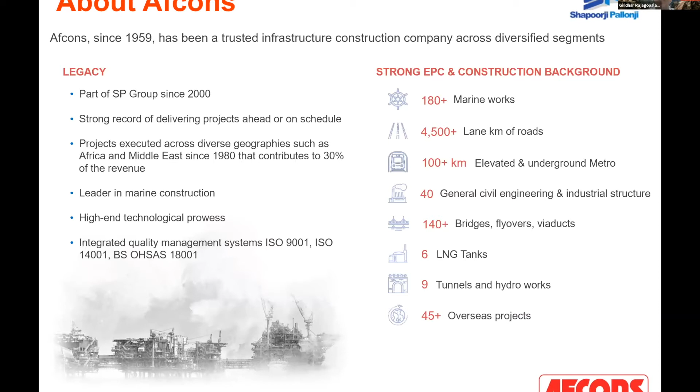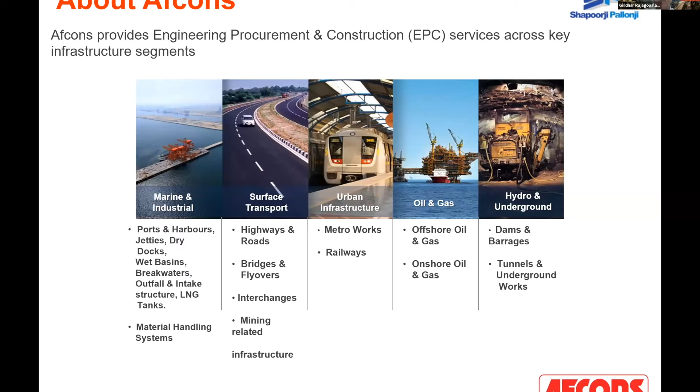Before I start, I would like to share some insights about the group to which Afcons belongs. Afcons is a part of the Shapoorji Pallonji group. It's been a part of this group from 2000. Afcons itself was born in 1959. We are about 62 years young, and we have a very strong EPC and construction background. We work in 5 verticals: marine and industrial, surface transport, urban infrastructure, oil and gas, hydro and underground, carrying out a gamut of engineering projects which are not only challenging, but in some cases extreme. That's a small nutshell about Afcons. Without wasting too much time, let me dive straight into the project. Let's look at Chenab Bridge.

Once completed, it would be the world's highest railway bridge. It's being built to link Udhampur, Srinagar, Baramulla as a rail link project. It is situated in the Himalayas, which is called a very active and young mountain. It has sub-zero temperatures, a very difficult accessibility to the location, a sensitive border area.

These particular things made us look at ways and means to carry out that project, and there was a great need to look at newer technologies and innovations in order to execute this project. Incidentally, this project is at an altitude of 840 meters.

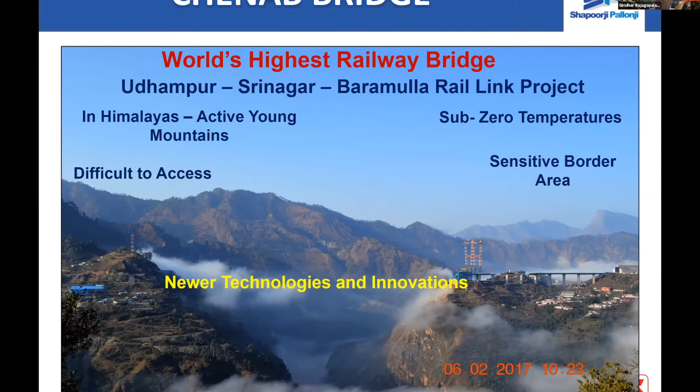What I would take you today through is a brief introduction to the Chenab Bridge, the details of the arch, the planning of the different elements, including the cable crane, trial assembly, lifting of the different members, transportation and erection of the wind bracings, global and local erection cycles, stressing of the stay cables, geometry control, arch closure, and then the safety challenges that we faced, the other challenges we faced, and what we have now foreseen as the factors that led to the successful closure of the arch.

So let me start by introducing the Chenab Bridge. Before I start the Chenab Bridge, let me introduce the key stakeholders. Clients are Northern Railway and Konkan Railway Corporation Limited. Contractor is Chenab Bridge Project Undertaking, which is an undertaking of Afcons Infrastructure Limited. Design consultants are WSP Finland and Leonhardt, Andrä and Partners Germany.

Proof consultants comprise Scott Wilson Kirkpatrick and Company England, Scott Wilson Kirkpatrick India, Flint and Neill London. They are now called AECOM and COWI since they were taken over. The slope stabilization part of this project was handled by IISc Bangalore, IIT Delhi, and Itasca USA. Last but not the least was the enabling work design, which to a large extent was done in-house by Afcons Infrastructure Limited.

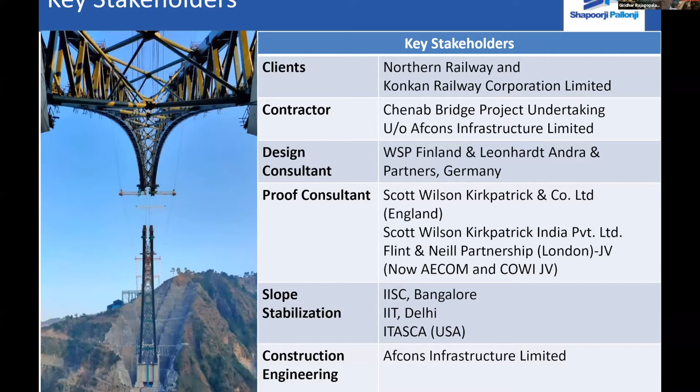The key to this project was the planning, which we will discuss in greater detail as we go more into the project. To give you a snapshot of this project, you can see the link between Udhampur to Baramulla. The blue portions of the project are the portions which are already completed, whereas the red portion, which is in the difficult part of the hills, is under construction.

Chenab Bridge is at about 125 kilometers from Jammu, and one of the most important challenges was the accessibility to the project. The nearest location, which is Reasi, up to which 40-foot trailers could go, had to be made as a transshipment point for all our materials, including our equipment. Our equipment had to be then transported from Reasi to the project site in knockdown condition, reassembled and commissioned.

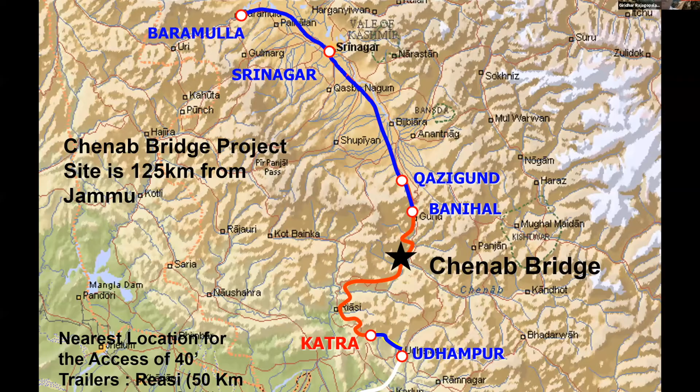I will show you the general arrangement. The key features are the total length is about 1,315 meters. It's about 359 meters above the high flood level. The arch span is about 467 meters, and the viaduct had both a transition and a circular curve, which was in itself a unique challenge. It was about 35 meters taller than the Eiffel Tower, if we want to compare it with the Eiffel Tower.

This is another view of the arch of the bridge elevation. The arch portion with the arch of 467 meters had a superstructure of 785 meters and a viaduct of 530 meters. Very important to note that the expansion joints that are likely to be provided in this project have movements of plus minus 800 millimeters, probably quite large in the context of Indian bridges.

There is something which I have now put on the slide, which is circled. These are the locations of the pylons which supported the cable crane, and the location of these was one of the keys in making the arch erection a very great success. Later, when I take you through the erection, you will understand the importance of these locations.

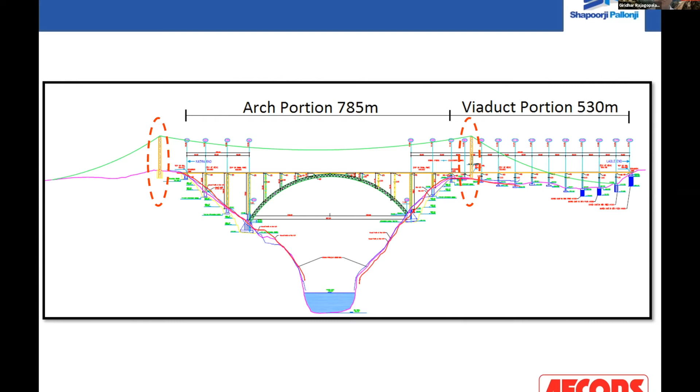Some of the main highlights of the Chenab Bridge in a nutshell are: it's the world's highest railway bridge once completed. It has a design life of 120 years. We have done an incremental launching of the deck superstructure on the viaduct, which had a combined circular and transition curve, the first time in the world. World's largest capacity crossbar cable crane has been used for erection. Extensive wind tunnel testing was carried out, first time in India for this project.

Fatigue designing and detailing of the bridge was again carried out for the first time in India. Installation of double corrosion protected bars and cable anchors also done for the first time in India. And we have used 10.9 grade, one of the largest diameters available in this grade, M36, with a Geomet coating to ensure durability of the bolts. The design was blast resistant. Some of the key other considerations were the geographical location of the project.

It's in the snow-clad Himalaya mountains, sub-zero temperature, so we needed to adopt very special structural steel. Highly active seismic zone, so hence a site-specific response spectrum had to be deployed. Dynamic analysis of the structure and ductile detailing was also the need of the hour.

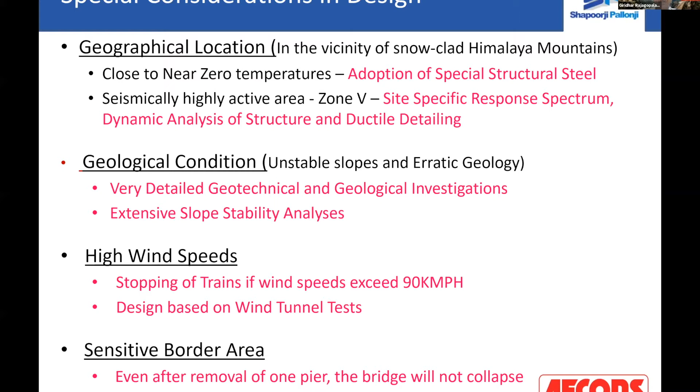Further, this being in a very sensitive border area, the bridge was designed with some redundancy. Even if one pier of the bridge is collapsed, the bridge would still stand under its self-weight. Further, when it came to the arch, we could actually remove one of the chord members, but still the bridge would be stable and it could still continue to carry traffic at a restricted speed. No doubt, the speed restrictions would continue till this damaged chord is reassembled.

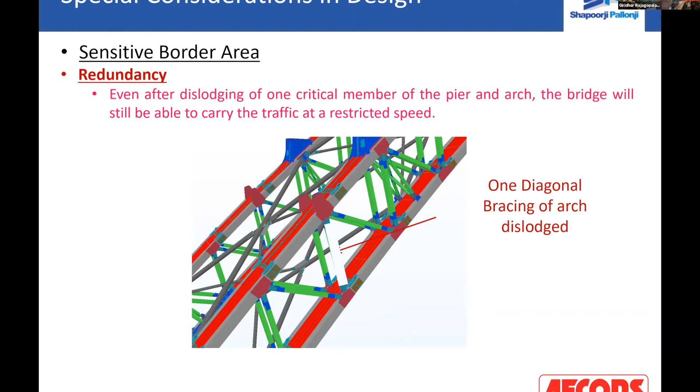Similarly, one of the vertical diagonal members could get dislodged, but still the same parameter of the bridge being stable and still being able to carry traffic at a restricted speed would be possible. So these are the special considerations under which this bridge has been designed.

What is not shown on this slide is the consolidation grouting that needed to be done on both the banks, which in itself could be a paper for presentation. This area has highly fissured rock, and hence it needed about 23,400 metric tons of cement to be used to grout it. Highly fissured rock, the need of the hour was to come to a fine point of ascertaining the pressure at which it has to be grouted. This in itself was a technical challenge. A lot of trials were carried out to ascertain the right pressure for grouting.

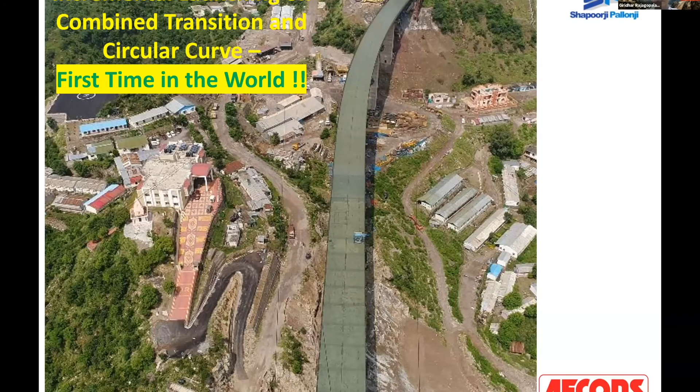When we go to the viaduct, this was the viaduct which we did on a combined transition and circular curve. First time in the world. This in itself was a great challenge. But what was very satisfying for us at the end of it was that we started the transition and the circular curve launching from P180, which you can see on the far right of the slide. And we went pushing this up to somewhere in between P120 and 130. Then we did the straight launching from P80 towards P120.

But what was most important was that when both these met with each other, the lateral adjustment that needed to be done was only 3 millimeter. I repeat, 3 millimeter, which was the accuracy that we were able to achieve by proper guidance mechanism.

Next, I will take you through some of the slope stabilization photographs. On the left, you are now seeing the slope of one of these sites, which is the left bank. Excavation was to the tune of about 6.3 lakh cubic meters. Rock bolting was around 33,000 running meters. Shotcreting was 55,000 square meters. And Dywidag bars were about 4,000 running meters. This was before excavation. So when we really looked at it and we went there the first time, there was a lot of wonder in us whether we could carve out this hill and create the foundations.

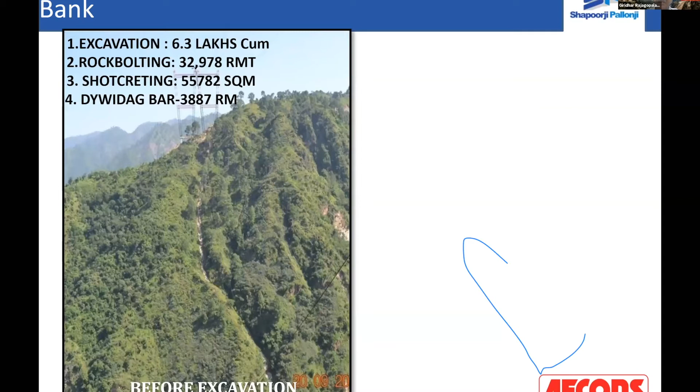I'll now take you through the right photograph. This is how it looked after we carved out the hill, carried out the slope stabilization, and located the foundations, starting with S10 abutment, S20, S30, and S40, which in itself is a gigantic structure supporting the base of the arch. The total vertical excavation was 215 meters with slope angles of nearly 70 degrees between the berms. And this was a very, very crucial element to ensure the start of the arch erection.

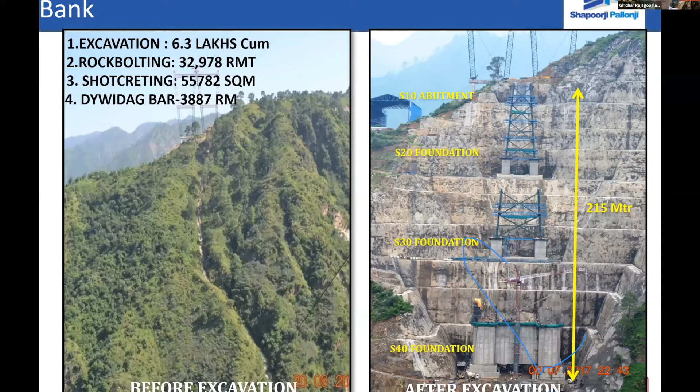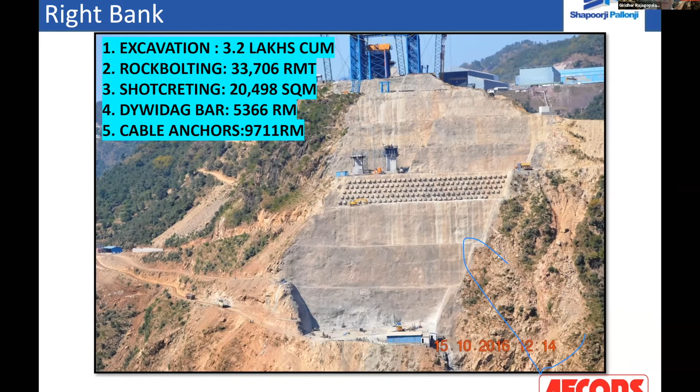What I would like to share here is that after the arch foundation was constructed, there was a pier that was erected on this arch foundation. This structural steel pier was 145 meters from the ground level. And what we could achieve was a great tolerance when it was finally erected.

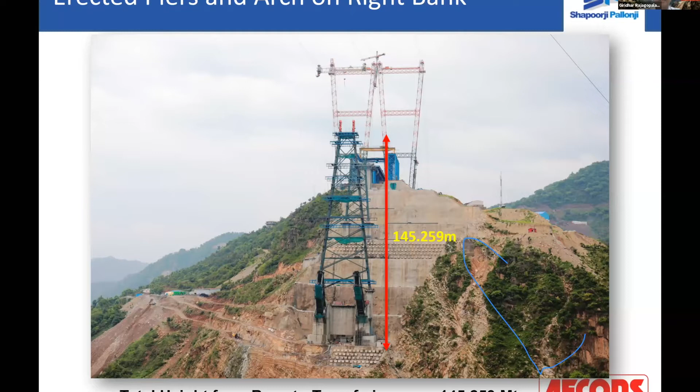This slide shows you that the designers had permitted a tolerance of 100 mm in any direction. This complete pier had HSFG bolts of 10,512 numbers. Bolt hole clearance was 2 mm. What I mean by bolt hole clearance of 2 mm is, if there was a 32 mm dia bolt, the hole that was drilled was only 34 mm. With this sort of tight tolerances, we were finally able to erect.

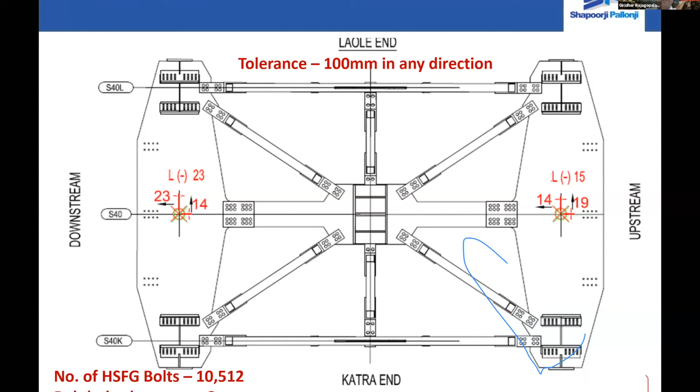I will now take you through the details of the arch, which is the topic for the day. The arch span is 467 meters. Height above the springing level is about 136 meters. The arch had a horizontal alignment which was straight, a vertical alignment which was level. The arch shape was parabolic. The taper of the arch in the vertical plane was 4.23 degrees. The arch had fixed support conditions.

The arch section had prefabricated boxes which were to be later filled with concrete after the arch is closed. Different grades of steel starting from E410C to E410 plus Z35 were used on this project. I would like to highlight here one thing. While all these materials are theoretically available in India, they are very rarely manufactured by the Indian steel parties. So a lot of input, proactive collaboration with the steel manufacturers had to happen right at the beginning to produce this steel of a right quality and grade.

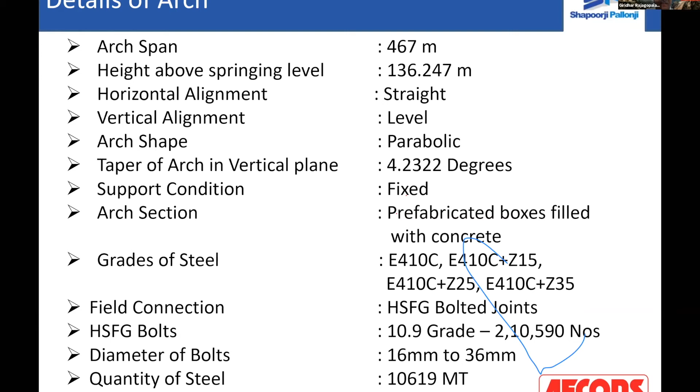Let me now take you through the planning for the design and erection of arch, the first part, which is the cable crane and sizing of the members. We have deployed the world's largest crossbar cable crane with a payload capacity when it works in tandem of 34 metric ton. On the right, you can see the image of the cable cranes working in tandem with a tandem bar. The weight of this tandem crossbar itself was 6 metric ton.

And the beauty of this cable crane is that it can be worked also individually with a capacity of 20 metric ton. So there were times where the left side cable crane was being used separately, sometimes the right side cable crane separately, and when the need arose, in tandem.

The maximum weight of the arch component hence was driven by the capacity of the cable crane, which was 34 ton. When the designers and Afcons sat together, a lot of brainstorming was done, and that is why the arch was split up into 1,375 components, which could each be handled. No doubt, while they had 1,375 components, the total number of lifts were reduced by other means, which I will explain a little later.

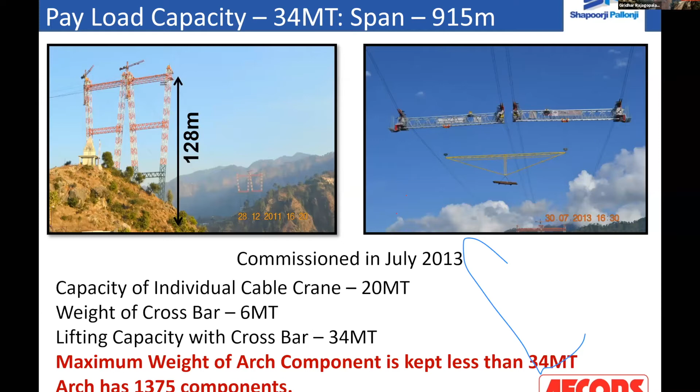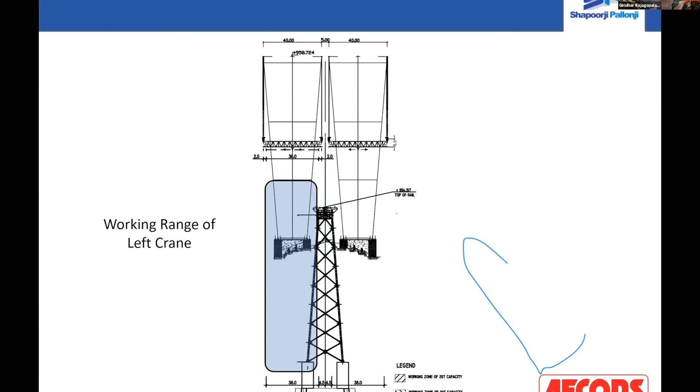When we look at the important thing which I explained a little before, you can see that the left cable crane had a working range, the right cable crane had a working range, and there was an area in between which could not be accessed by the cable crane. So to access those areas or greater weights, there was a need to combine the cable crane and use the crossbar, thereby not only covering the total width, but also having overlap to help us handle the project easily.

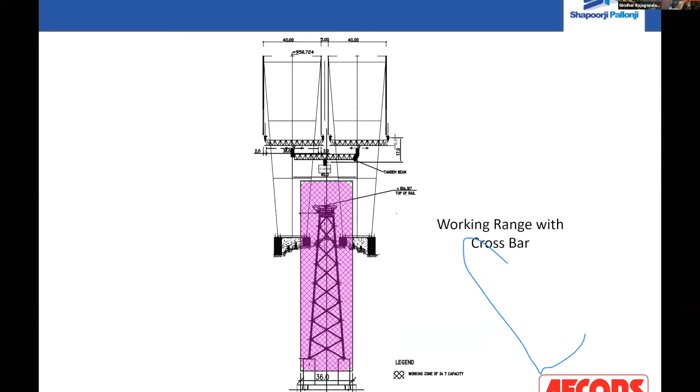We will now look at one of the important components, that is the trial assembly, which we did. There was a lot of debate within our teams, along with our designers and our project people, about whether at all we should carry out a trial assembly. And if at all we carry out a trial assembly of a structure which is 467 meters, where do we find the place in the mountainous terrain to do this erection?

A lot of brainstorming extending into late hours happened, and finally we came to a solution, which I will explain in the further slides. But first and foremost, we decided to do a mock-up of the arch in a scale of 1:10 to understand what sort of tools and tackles and enabling works we will need to incorporate in the process, so that it will be very easy for us to erect the arch segment, bolt it, and also maintain its geometry. With this sort of a study on a scale of 1:10, it gave us the confidence of building upon it on a larger scale.

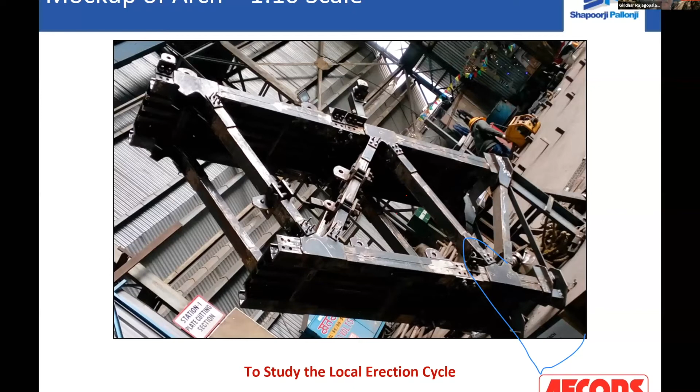This is one critical component of the arch erection methodology. The second part was that we looked at trial assembly in a laid down condition. I will explain what the laid down condition means in the next slide. It was also done so as to accommodate two modules of wind bracing at a time. This was critical because the place available at the location was not adequate to completely erect even half the arch in its totality. But all these precautions and trial assemblies, which I will explain, actually led us to do finally what I would call a flawless erection of the arch, leading to its successful closure.

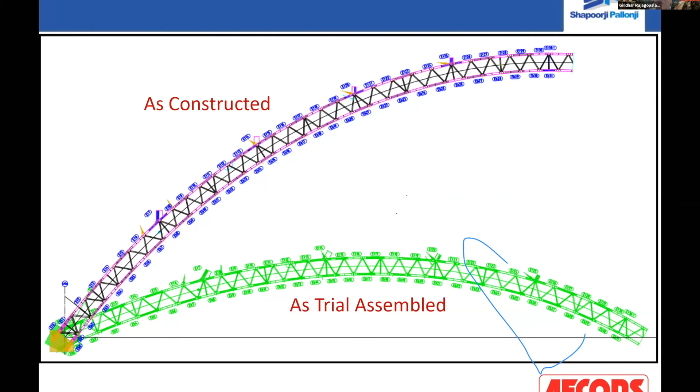So what I call a laid down assembly: the figure on the top shows the as-constructed location of the arch. But when the trial assembly was done, it was rotated so that the handling would become easier, and the trial assembly was carried out in a laid down condition. The trial assembly was also carried out for two modules. You can see module 1, which is approximately 40 meters. Module 2, again, approximately 40 plus meters. The joint between module 1 and module 2 is the place where the wind bracings are ending.

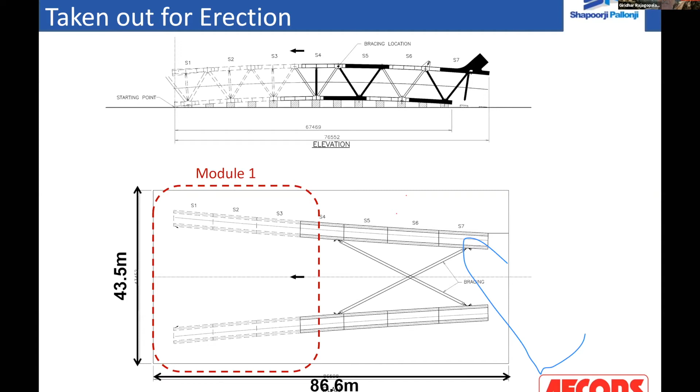We decided that the trial assembly will be carried out on a plan area of about 90 meters by 50 meters, which we developed near the top of the bridge at the right bank, and we used this space to do this trial assembly. Module 1 and module 2 were first erected. Subsequently, module 1 was dismantled and moved out and sent for sandblasting, grit blasting and painting. Module 1 was then moved back, and then module 3 was erected, and we continued to erect till we reached the crown of the arch. This we did both for right bank and left bank next to each other, and hence this complete trial assembly gave us a level of confidence that we would definitely be able to erect the arch in its final form. This was the second key parameter, I would say, to achieving a flawless execution.

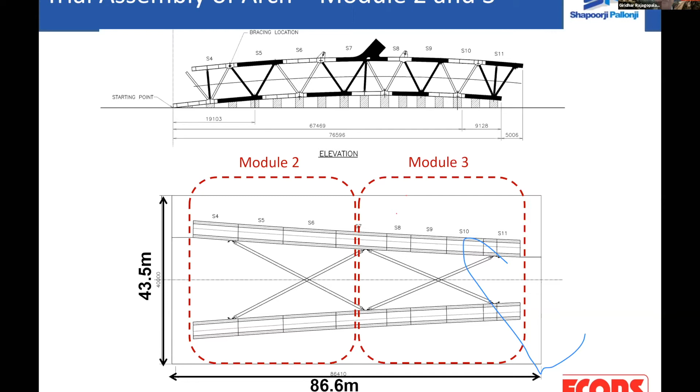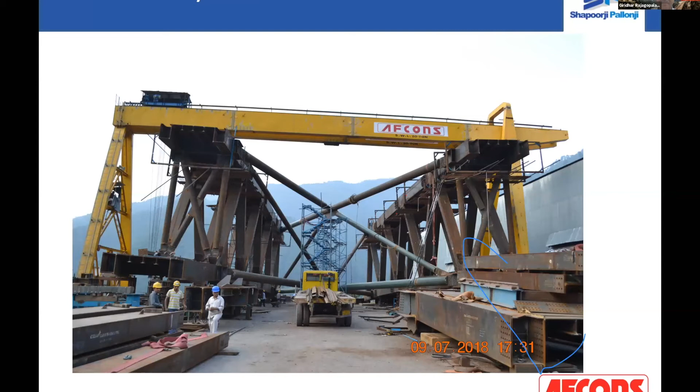Now we'll go into the next part of the criticality of an arch, which is the lifting of the individual arch segments. It is not out of place to mention here that the arch segments are inclined inwards with an angle of about 4.2322 degrees. In the vertical plane, the arch segments vary from an angle of nearly 52 degrees to near horizontal in the center. The segments also needed to be lifted by the cable crane as nearly as possible to the design inclinations, so that with minimal effort, the erection of the segment can be completed.

As I explained previously, we had 1,375 components, but by pre-assembling some of the components based on the weight and the capacity of the cable crane, the total number of lifts was reduced to 944. The reason being, as we dived deep into the project, we came to the conclusion that in order to do a safe erection of the arch, there is a great amount of enabling works and platforms which will give access safely, and that itself was amounting to 378 lifts. So in order to reduce the load on the cable crane, we combined some of the arch components to 944 lifts, so that the total lifts would still be around 1,300.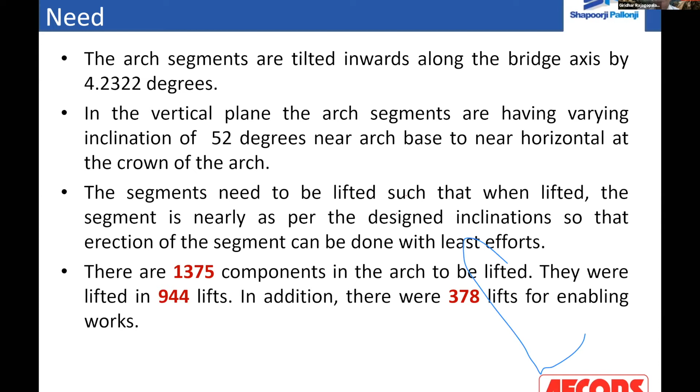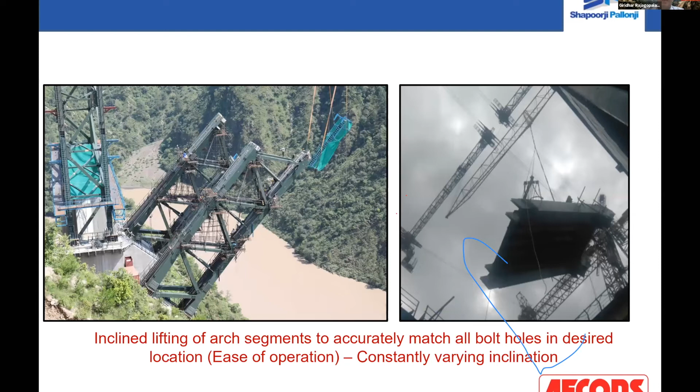These are some of the photographs of the segments of the arch being lifted. You can see that at the beginning, it is at 52 degrees. And as we go towards the center, it was nearly horizontal. This was the methodology used.

Here, I would also like to say that thanks to our consultants, right from day one, they started working on a 3D model using Tekla. We were also asked to get ourselves fully trained and equipped by using Tekla models. So we had a good team within the project team who were competent to handle the Tekla model. And using the Tekla model, we were able to determine very accurately the CGs of each of the segments that we were planning to lift, and were able to derive the different lengths that we needed to use with adjustments for the different slings that were used.

This was, I would say, the third critical event, the planning of the segment lifting and the detailing and the lifting for each and every element of those 944 lifts.

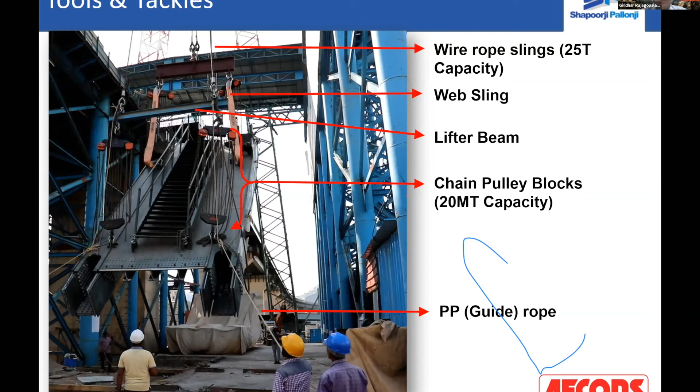Here you can see some photographs where you can see the wire rope slings, the web slings, some lifter beams to assist in the lifting, chain pulley blocks to adjust the micro-millimeter changes that we needed to do, and the polypropylene guide rope, which forms one of the keys in ensuring that the material doesn't sway as it moves to the location with the cable crane. Another view of the lifting arrangements, two different types of lifting arrangements that we used with the cable crane.

Now I will come to one of the most important components of this erection, which was the wind bracing. In the trial assembly, I had shown you that the wind bracings were erected, and the length of this wind bracing was approximately 40 meters. But to carry it, you can see, from the location to the place where it can be fed into the cable crane was itself a challenge.

Second, the arch at the beginning had a width of 35 meters, and at the crown it almost reduces to 9.5 meters. The wind bracing had gussets in 3 directions. So geometry was a big challenge for us in this.

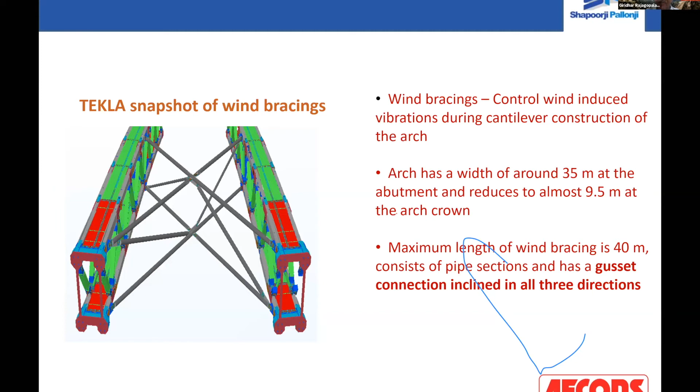So once the trial assembly was perfectly achieved, the pipes were all dismantled. They were made individual. And then, just to show you the complicated photograph of the location at which these gussets are coming, if you see on a typical central joint, there are 116 HSFG bolts, again with that same 2 mm clearance, and we were able to achieve it with no imperfection. And you can see how snugly it has fitted into this system. This also was because of the trial assembly and getting it all resolved before it actually went to the site.

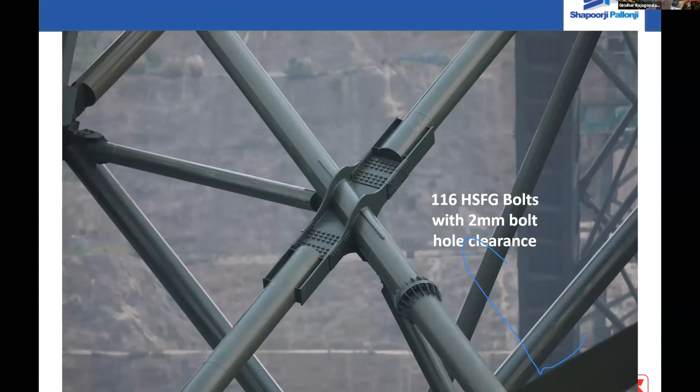Also, transporting these pipes after they have been trial assembled, grit blasted and painted was a challenge. The road from the place where it was trial erected to the location where it can feed the cable crane was a very, very steep incline. This road not only carried this pipe, which was a far lesser weight, but at one stage also needed to carry the superstructure that was erected from P80 towards 120, which was weighing nearly about 140 tons.

So a lot of thought process and decision on getting the gradient of the road right, the material to be used on the road to get the right traction for our prime mover to be able to pull that 140 tons on an SPMT to the location was actually done on paper first as an enabling work, executed at site, so that the operation became very smooth. This is a photograph of one of the pipes being moved to the location with the help of 2 cranes.

Most importantly, in the third or fourth slide, I had shown you the location of the pylons of the cable crane. This is a berm which is at one of the foundations at the top. And berms were used very innovatively to stack these materials. No doubt, the excess load on the berms was checked from a load point of view so that we don't have a problem on any of the berms, in discussions with our consultants, IISc Bangalore. So adequate precautions were taken.

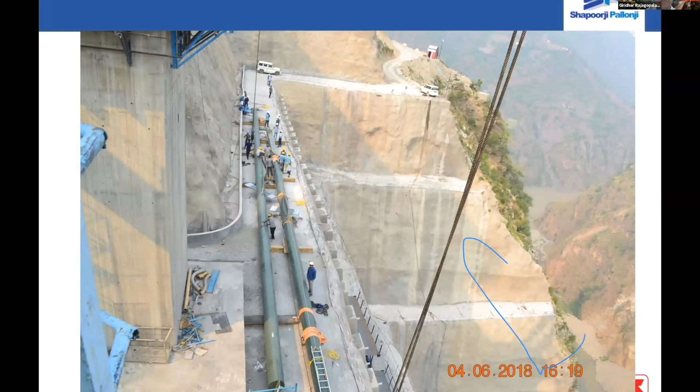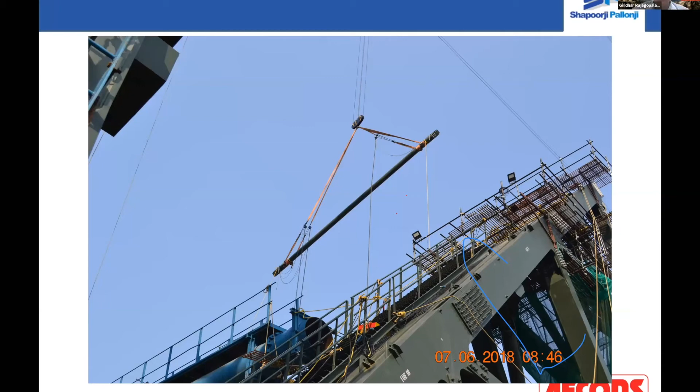This is another view of the cable crane actually lifting it and taking it to location. And most importantly, what this photograph shows you is the safety features that we incorporated in the enabling works. The blue parts of this photograph clearly distinguish the enabling work from the permanent work.

You can see that the worker is having a safe access to each and every point where he needs to work. You can also notice that on the already erected arch, there is a ladder with a handrail that is provided, which is a permanent feature of this arch, which was constructed along with the segment itself, so that it gives access to our workers to reach each and every point.

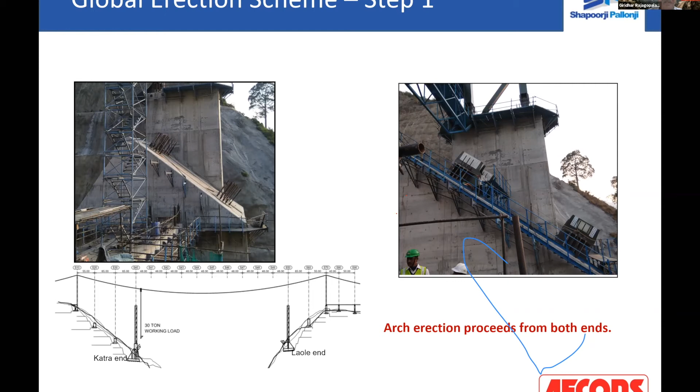So we started with 30-ton working loads from the cable crane. The cable crane was used to start erecting the arch segments. After a certain element of the arch was cantilevering, which was about 70 meters, the first of the forestay cable and the backstay cable were put in place, and they were stretched appropriately as per design requirements.

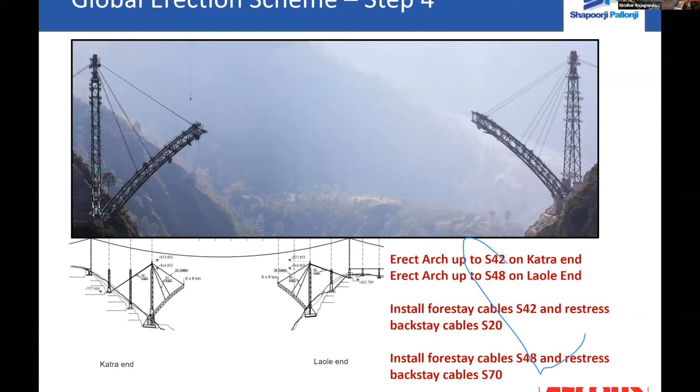Geometry control was ensured here, and later we moved to the next portion of the erection, installed the next set of stay cables, and in similar fashion we went ahead with erecting certain part of the arch, again putting cables and holding it back till we reached a level where we were close to closing, and that's where we stopped.

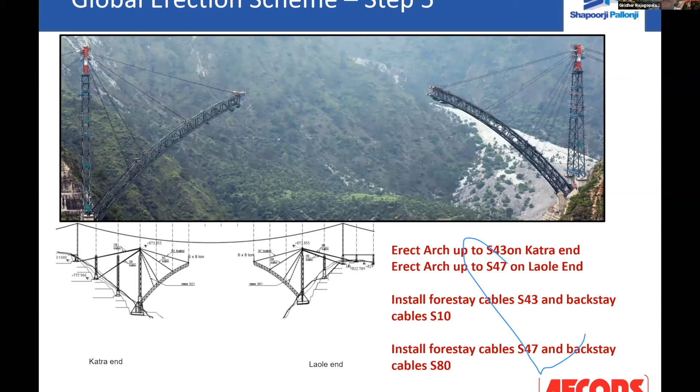This particular part, arch closure, I will explain separately. This is a photograph of the closed arch as it looks, but we will separately have a small detailing of how this arch was closed. This is global erection in its totality.

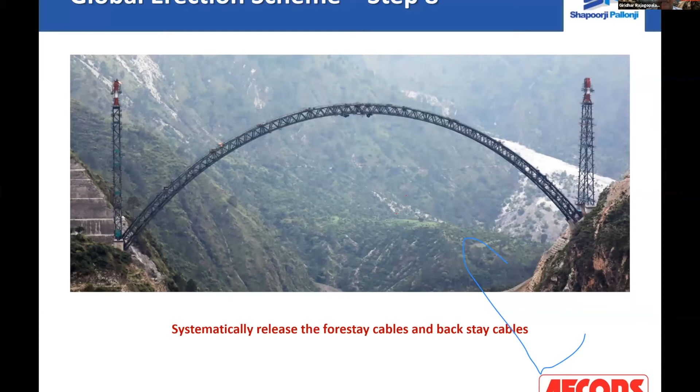So once the global erection is completed, that's not the end of the game. We needed to remove these temporary cables. So all the temporary cables were removed, which in itself was a project at that height and at that weight. And once they were removed, then we were able to go to the next process.

One point I would like to share here is the stressing of the temporary cables itself had a lot of sequencing to be developed. Here, I would not be hesitant to say that as these cables were being stressed, there was such a great and very, very helpful interaction with our client, with our consultants based out of Finland and Germany. They were available to us, I would say, nearly round the clock, helping us as we did the stressing and ensuring that we were able to get the perfect geometry as we move forward.

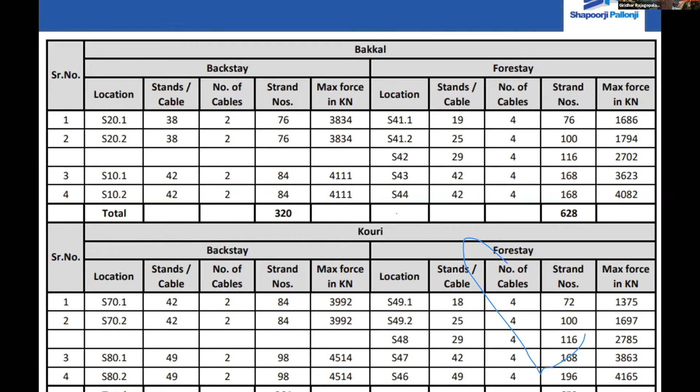Then we moved in to do 100% on the backstays, and then moved into the inner cables to do a 50%. So there was a constant movement of this stressing from inside and outside, but all the stressing was happening on the temporary pylon, both on the left and right. So the movement of these pre-stressing equipments was minimized so that there could be good saving in the time.

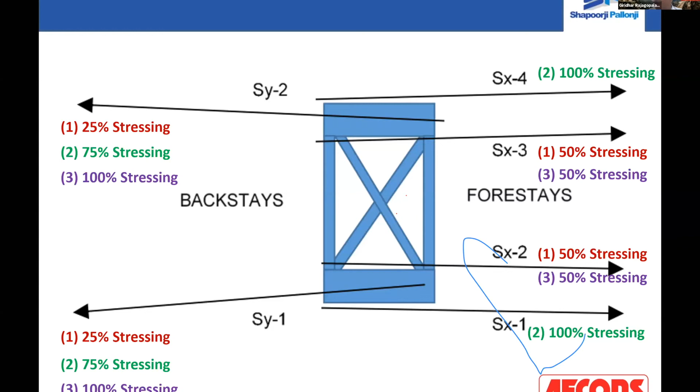Now we will come to the most important part of the project, which is the geometry control. And I would like to share with you the most important part was the springing point of the arch. That is the point from where the arch takes off from the concrete foundation. Huge amount of effort and concept and brainstorming was carried out to ensure that the base plate of the arch was embedded in the concrete foundation to a great level of accuracy.

No doubt, our past experiences of providing template and bolts for very heavy foundations like turbines did help us evaluate various methods. But the challenge here was that this complete template, if you see, was at an inclination. So we developed a template. This template had a lot of shear studs at the bottom. It also had bolts coming out through it.

And this full thing was embedded in the concrete with 6 geometry control points at the top and 6 geometry control points at the bottom. And we imposed on ourselves a tolerance of 5 mm, handling this weight of 10.8 and using a lot of time and precision to get this position. In one case, it took us nearly 2.5 days to fix this base plate.

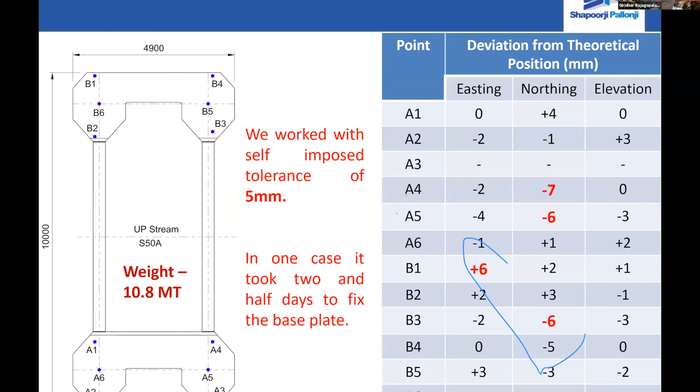So with this sort of a tight tolerance, we started erecting the base module. This is the base module that is being positioned. You can see the template at the bottom with a lot of rods sticking out. These base modules will get fitted into it. And subsequent to that, the gap between the base module and the template was grouted with a multi-metal compound, which can fill gaps up to 0.1 millimeter.

The intention being that the arch is a compression member, and it was a requirement that the arch be completely under compression and have full contact with the foundation. And so extra care and precaution in geometry, in fixing the base module and in ensuring 100% contact was ensured by these methods.

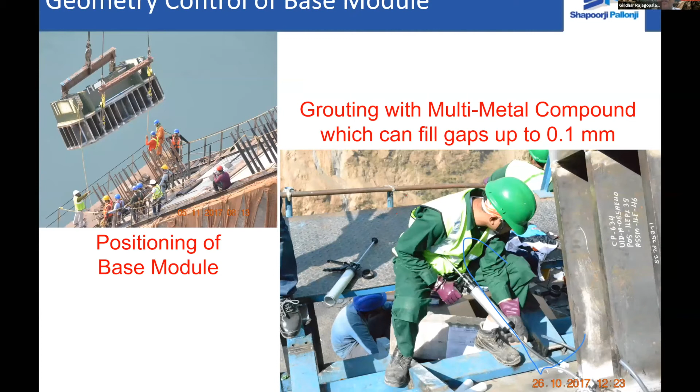This is another view of the erected base module, which you can see. You can see the safety access ladders that are provided all around, including the walkway. They are fully at an inclination.

And then there was further geometry control that was required to be carried out as we went subsequently with the arch erection. So some of the things that we did was that the designers, in discussions with us, we had 2 workshops in Stuttgart where we worked closely with them, and we came out with a set of geometry control points. And for each of these points, they had given us the theoretical coordinates at a baseline temperature of 20 degrees. Most importantly, and sometimes what is missed out and could lead to big issues, is the second bullet point here, that is the baseline construction loads.

In these workshops between the Afcons in-house enabling work team and the consultants, Leonhardt, Andrä and Partners and WSP Finland, each of these construction loads was positioned. These were detailed in the model by the consultants, and based on that, they gave us the theoretical coordinates, which were used by us when we started erection. So a lot of work went into developing the coordinates and the measurement of the coordinates.

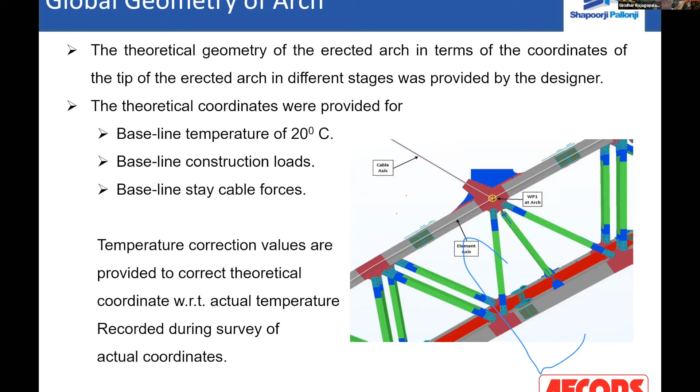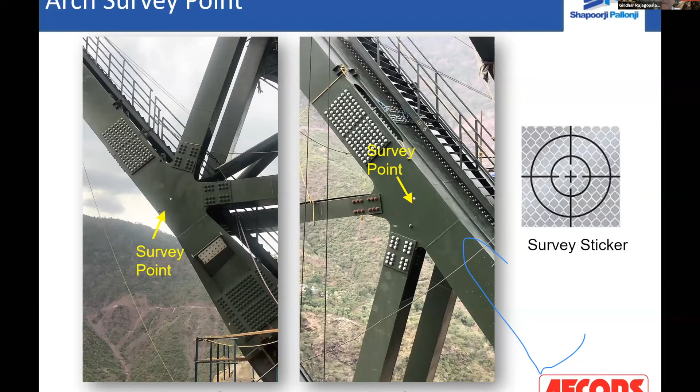You can see some of the survey points that were put. When it was close to the shore or to the bank, we used just a sticker, which was a luminescent sticker with a point. You can see on the right the survey sticker in the next slide. But as we moved further away, since the arch was going inside and the visibility was becoming a challenge, this point was pulled out by means of a vertical member sticking out with the sticker put on top. And the total survey was controlled by a total station.

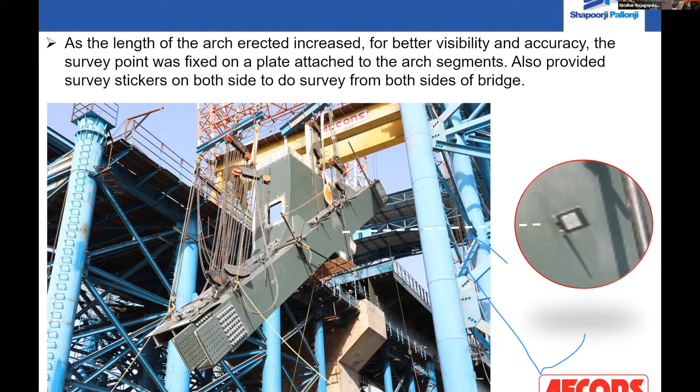2-3 fundamental things we ensured. We ensured that these points were the points that were on the drawing board, and hence we were measuring the coordinates of the same point which was given to us by the consultant. Second, and most importantly, all the survey work was done before 8 a.m. in the morning so that there is no temperature impact on the survey. And the temperature at the time of survey was also recorded so that we could cross-check it at any given time. Ultimately, these precautions and these workshops were very helpful because they ensured a flawless erection of the arch in its entirety.

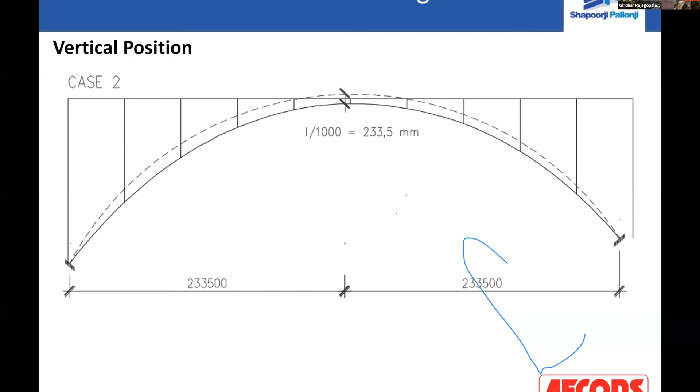Some of the tolerances that were provided by the consultant were in the vertical, horizontal, lateral. They had given us a constant of 233.5 mm. I will just take you through the next 2-3 slides quickly. Vertical position, below the theoretical, above the theoretical, horizontal position as can be seen from the drawing, and then the lateral position on the plan view.

So all the locations they had given us a 233.5 mm, but with the tight geometry control that we were able to achieve, and with the other things which I told you, the 4 important things like trial erection, like assembly before, all which we did, and the survey, the base module fixing in correct location. Ultimately, this was the formula on which they had given us the tolerances.

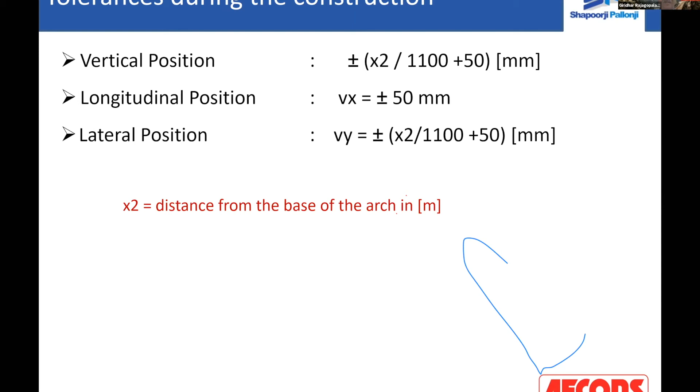What I would like to point out here is that the X2 is a very important phenomenon. As the length increases, the tolerances were being permitted to be increased, but our intent was never to go to the tolerances. So with this sort of a control, we achieved these tolerances at the end, just before closure of the arch. You can see the vertical tolerance provided was 100.4 mm.

The tolerances in the direction of the bridge was plus minus 50 mm. The tolerance in the lateral direction was plus minus 100 mm. But you can see that as per the figures that we have, we were well within these tolerances, which are actually listed by red arrows at the edges of the arch, which are standing freely erected.

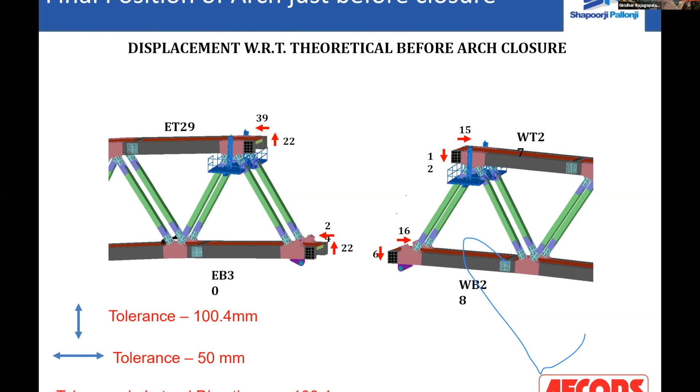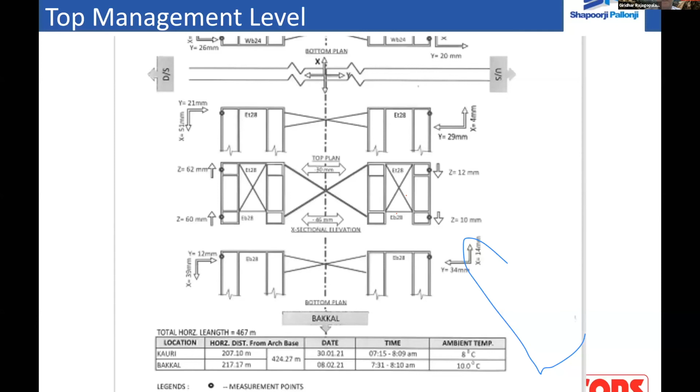I will go to the most significant part of the arch. We will look at arch closure. When we have actually erected the arch, it would not be out of place to mention here that the arch would be cantilevering nearly 230 meters from each side. So it would have its own dead weight deformations and deflections. Also, there would be a certain amount of lateral misalignment.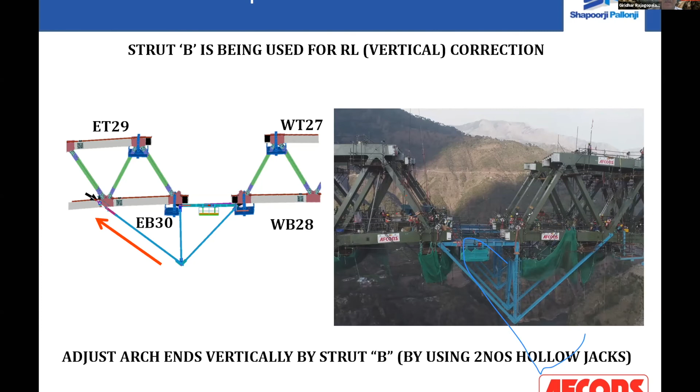A tripod was erected and a force was applied in the direction that is shown in the red arrow. This was a very small force, and this enabled us to do the fine-tuned adjustments of the bottom chord and get it into the correct geometry. Once this geometry was achieved, the prefabricated bottom member, with one of the splice plates on one side not being drilled, was brought to location.

It was lowered in location and the splice plates were rotated to take the markings of the holes already provided on the arch. It was rechecked for accuracy and it was found that it was within millimeters. So it was withdrawn, taken to the shore, the splice holes were drilled, brought back, and then it was subsequently lowered and installed. And this was the segment EB31.

So here, the only small thing I would like to note is that the splice is both on the left and the right. So the splice would have two pairs of holes on the right, two pairs of holes on the left. The left holes were pre-drilled; on the right holes, one side was pre-drilled, the other side was kept free for taking a proper measurement and ensuring that it got properly fitted. But even in this case, we were within the tolerance of 2 millimeter.

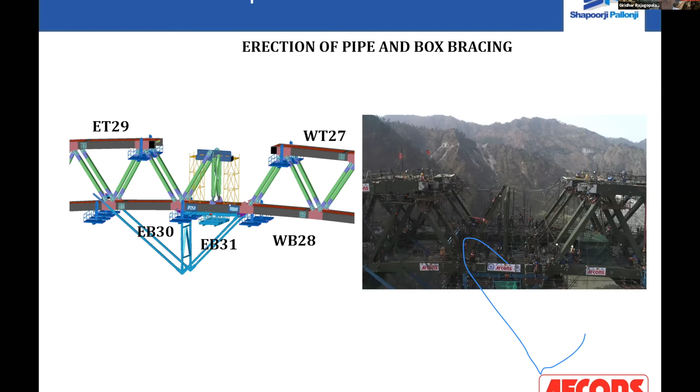So this closed the bottom chord, but that is still not the end of the story. After the bottom chord was closed, the vertical bracing and the diagonal bracings which were to support the crown element were fixed in place. Then the crown element, which is ET 30.1, was put in position. And once the crown element was installed, the element between ET 29 and ET 30.1 was fixed.

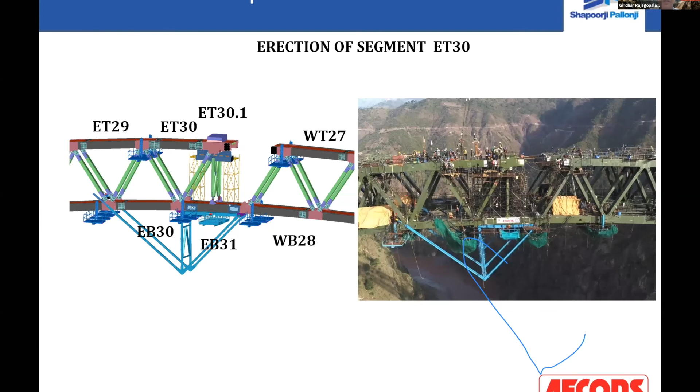After fixing this, again, there was a need to see that the top chord geometry is as per theoretical geometry. So none of these bracings were fully tightened. A Y yoke was installed, as is shown now in this photograph in blue color. And using this Y yoke, ET30 and WT27 were pushed against each other to again ensure that there is a small rise, and the gap as required from 5498 was made 5603, which was the theoretical requirement.

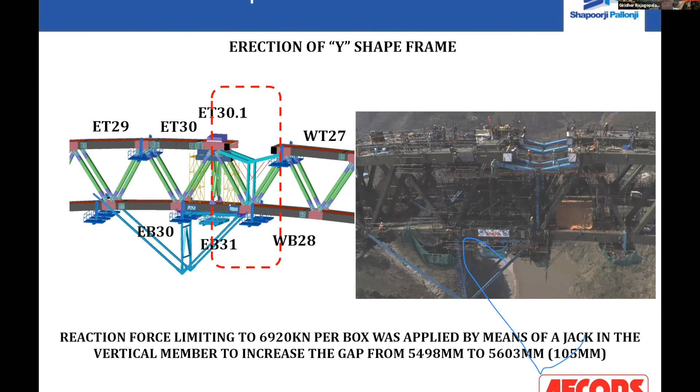Once we reached the theoretical requirement, a similar thing as was done in the bottom chord was repeated, and this segment with the final holes all drilled is now being lowered to achieve the arch closure. With this, we were able to successfully close the arch on 5th April 2021.

Let me now take you through the challenges, because all this seems easy once the work is completed, but there were challenges. So some of the safety challenges were the need for safe access to the erection point from the base of the arch to each and every location of the arch, secure and stable working platforms at the erection point, ensuring that under adverse weather conditions and wind speed we do not carry out work, and since all activities were happening at 50 meters, we needed to not only train our people, but adequate advanced life gear systems were to be deployed to ensure that there is safe work.

As I said, there is a huge amount of enabling stable platforms that were involved, which was nearly 300 plus lifts on its own. Adverse weather conditions were being monitored by getting daily weather reports for the day and for the next 3 days in advance. Wind speeds were monitored not only with anemometers at fixed locations, but also by handheld anemometers, so that whenever the wind speeds were increasing beyond permissible limits, work was discontinued, which resulted ultimately in safe working.

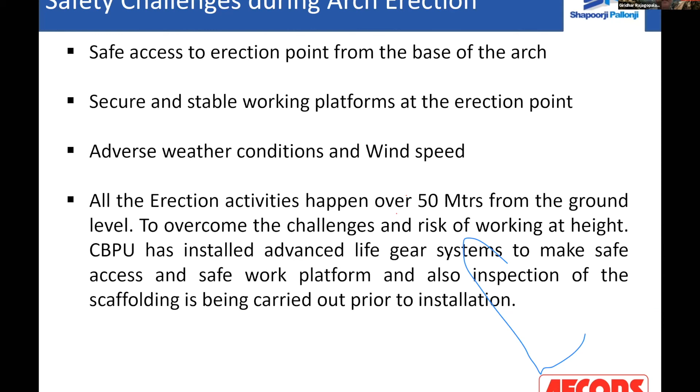These are some of the fixed lifelines that were used. We did a lot of work on it, and we were able to locate good international parties which could supply these lifelines. We used these lifelines successfully, and we were able to see that even if a person slips, he will not fall down, because each of these lifelines can take a load of 23 kilonewton.

These are other safety features. For example, you can see there was a very easy suspended seating arrangement. Not only that, though he is suspended, there is a retractable safety device that is hooked up to his rear, so that even if that suspension seat sling slips, he would still not fall, because the retractable fall arrestor would help him in safe working. You can see that all the workers are safe when they are working at these different areas.

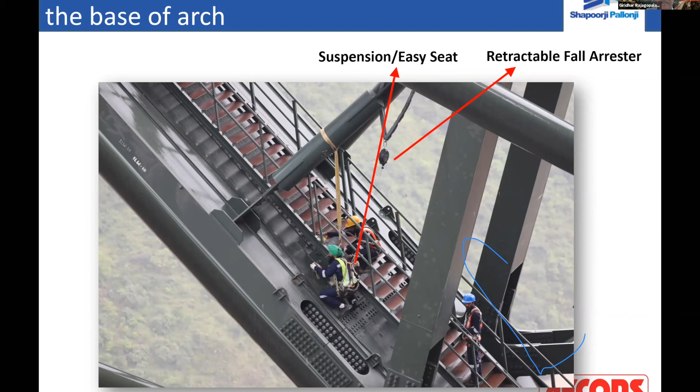This is another view of all the scaffolding. This is a view where even the scaffolding was inspected on a daily basis to ensure that everything was in order before people were permitted to go and use it.

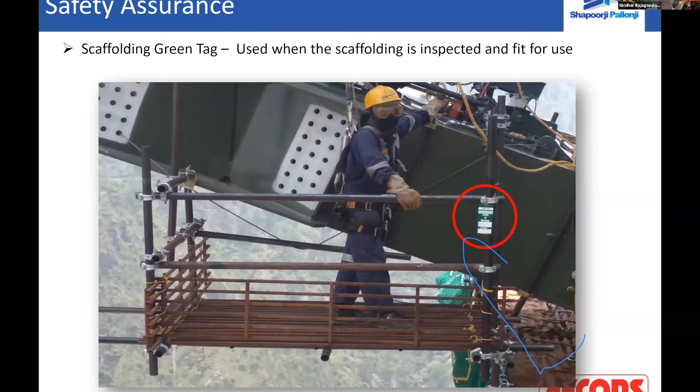And ultimately, the result of all this was that the National Safety Council of India reviewed this project in its totality from a safety perspective. They normally have platinum, gold, and silver as the awards. They felt that the quality of the safety measures taken in erecting this most difficult and iconic arch called for something greater than even the platinum and gold awards. So the jury were kind enough to award a special jury award, which they called the Ati Vishisht Suraksha Puraskar.

The man-hours that we had without any lost time accident from January 2019 to December 2019 was 3.99 million, and till date from January 2019 it is around 8.2 million man-hours in this arch area.

Next, we will go to the challenges that we faced during the arch erection. One most important backbone of this erection was the cable crane. Unless the cable crane was working, no work could be possible. I would not hesitate to say that the cable crane suppliers from Austria were very, very cooperative with Afcons in ensuring that they were available to us whenever required.

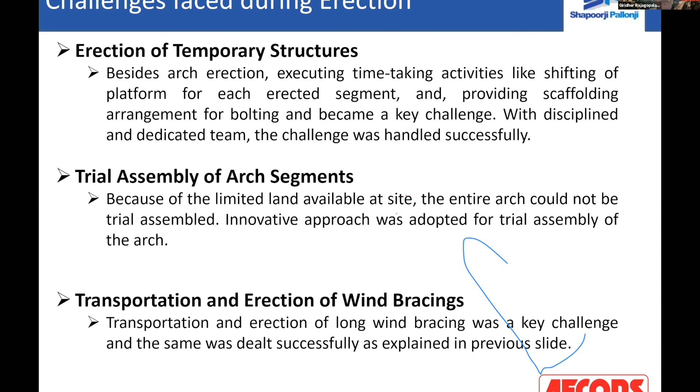Tightening of the HSFG bolts was very crucial. A combined method of torquing was adopted. A detailed method statement was prepared in discussions with our consultants for installing the HSFG bolts. And while these are all on paper, it is important to say that it was meticulously followed by the project team, it was documented, and it is even available today as a documented part of the project.

Here, I would also like to tell you that each and every component of the arch, be it the bolt, be it the steel plate, be it the bracing, has a unique ID and traceability, and these records are available for the future as well-documented literature. Considering that the work was happening at very great heights, specially imported lightweight battery-operated torque wrenches were procured so that there was ease of working for these workers working at height. These were some of the challenges and what we did to overcome them to erect the arch.

Some key factors to summarize, I would say, is detailed and meticulous planning. Lots of workshops were held at different stages of the project. A lot of midnight lamps were lit. And I remember some of the workshops where we even worked up to 1 o'clock without even realizing it's midnight. That was the passion and the attitude of each of the engineers who were at the project, including our consultants, to make this a success.

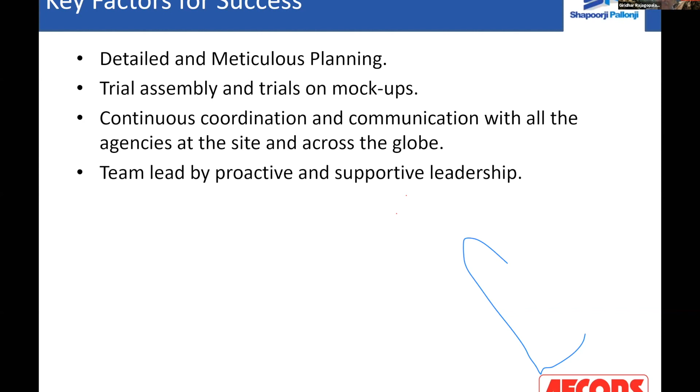There is some small thing which I want to share with you about the balance work, because the arch closure by itself is not the end of the project. Post closure of the arch, we need to first concrete the boxes. Presently, the work of concreting is in progress. There also, it needs to be meticulous. We cannot just keep pouring the concrete. There is a rate of rise that is permitted, and we have to stick to those parameters.

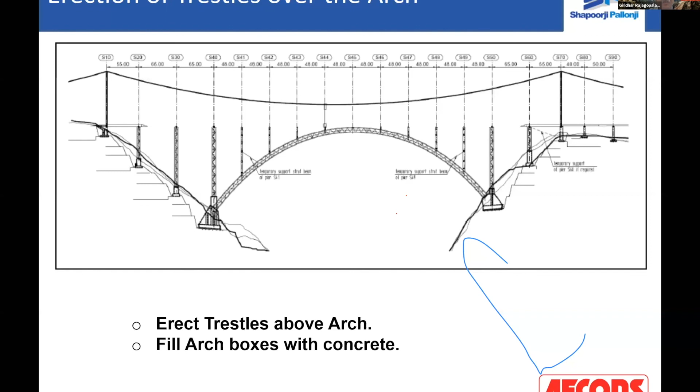Then the trestles would be erected. And once the trestles are erected, the incremental launching from both sides would happen, and that would meet at the middle, at the crown. And once it meets at the crown, the bridge would be ready for operation. Thus, what was seen as a challenge will ultimately turn into a marvelous piece of work.